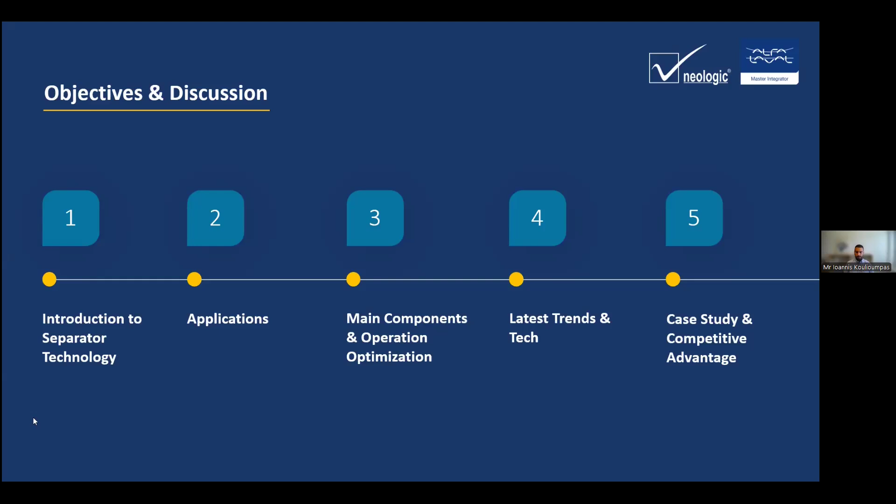And then we will finalize our presentation, before the questions, with a case study about how the advancement of separator technology helps not only on separation itself, but also on energy saving solutions. So let's start with a very small introduction to what separator technology is.

Before we go to that, just to say that we at Alfa Laval are of course proud to be the company that founded and has been innovating, because the company itself has grown on the design of the separator itself from 1883. So this is a product which has been the core of Alfa Laval for more than 130 years now. And our aim is to continue to innovate even more with that product and go forward in order to take separation technology to the very last extent.

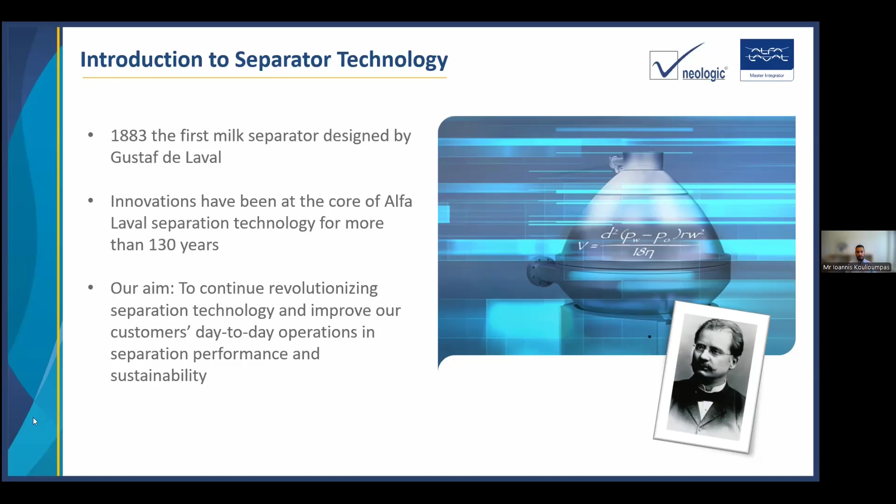And how does the separator work? Basically, it's a technology where you have, in practice, mechanical separation by density difference due to using a centrifugal force. You're separating by density two liquids, or liquids with solids. So it's not a very exotic physics behind it.

However, the design, how we select to create the separator and how we generate its design, gives different perspectives and different technology advancements on the separation performance itself. So there are technologies that are bottom-fed and hermetic, and other top-fed technologies, that create a performance difference in the end on the customer side.

Of course, the performance itself is affected by different parameters, because separators are not only used for dairy but also for other applications. But on the dairy side, the type of product we're using, milk or whey, the flow, the particle size, the temperature, and the density differences affect how separators work and are critical parameters for us to consider when sizing a separator for a different application.

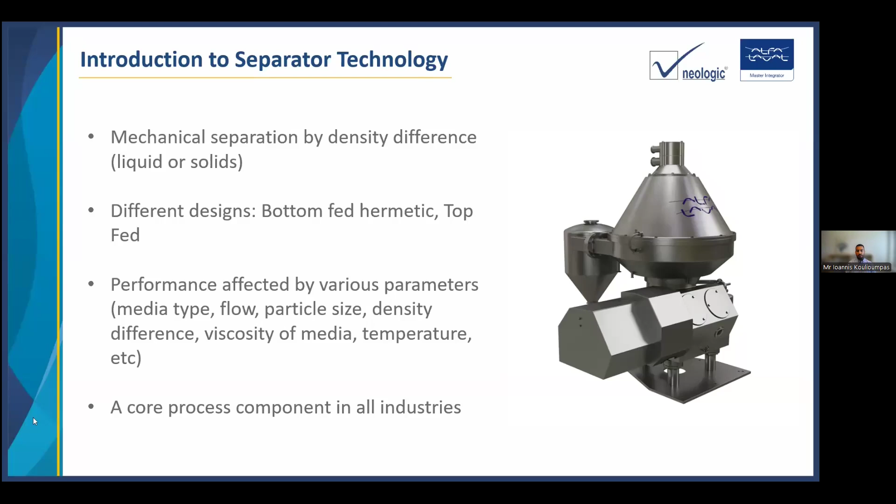However, I also have to say that the separator is a core technology for all food industries. No matter the food industry you are in, you will definitely see a separator on the processing side. And with that being said, I will ask Mr. Mahajan to discuss a bit more about the applications.

As you know, Alfa Laval is a well-known name, and Alfa Laval is the inventor of separation technology. Alfa Laval has been present in India for almost 90 years now, and more than 2,500 separators are working across various parts of India in many dairies. These separators range from 1,000 liters to 50,000 liters. So let us see how separation technology can be used in milk.

First is clarification. When we receive raw milk in the dairy, we have to remove solids like dust particles, somatic cells, and everything, so that raw milk quality is improved. If these impurities are removed, they do not go into further processing like pasteurization, homogenization, and other things. It is important to remove the somatic cells, hair, and many things in the clarification process.

Cream separation. Separation of cream is essential, as you know the fat content of cow milk ranges widely, from 3.5% to 5.2%, depending on the breed and the lactation period. Similarly, for buffalo milk, the fat percentage is always higher than 6%. In market milk, standardized milk is around 4.5% fat, toned milk 3%, and double toned 1.5%. To adjust this fat percent, we have to remove the cream from the milk. That is basic cream separation.

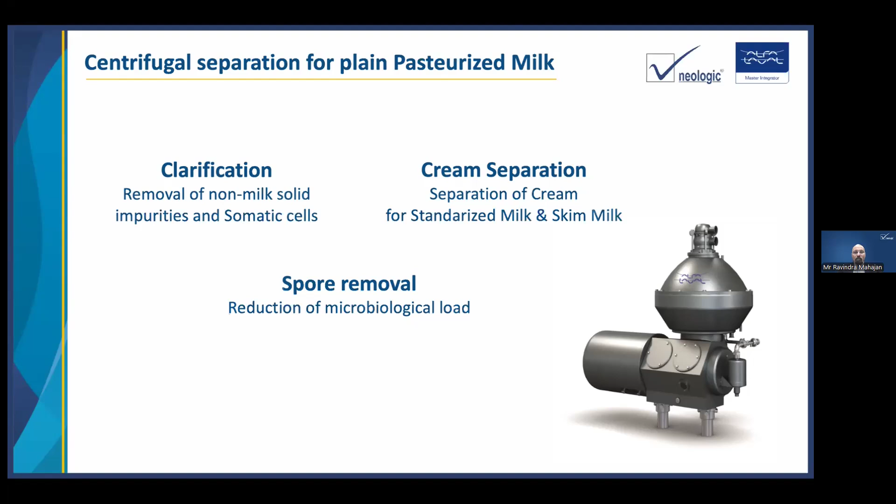And spores removal, reduction of bacterial load. If we are successful in reducing the bacterial load of the milk before thermal treatment, we can reduce the thermal treatment load on the milk and preserve the basic nutritive value. As well, we have fewer microorganisms to kill, so we can maintain lower temperatures in the pasteurization, thermization, and sterilization process. So these are the main three applications.

Now let me take you through clarification. It improves raw milk quality by removing non-milk solids like dirt, straw, sand, animal hair, etc., and also removes somatic cells. In the process, at raw milk reception, we do a cold clarification. It is also possible to use warm milk and do the clarification so that the viscosity is less.

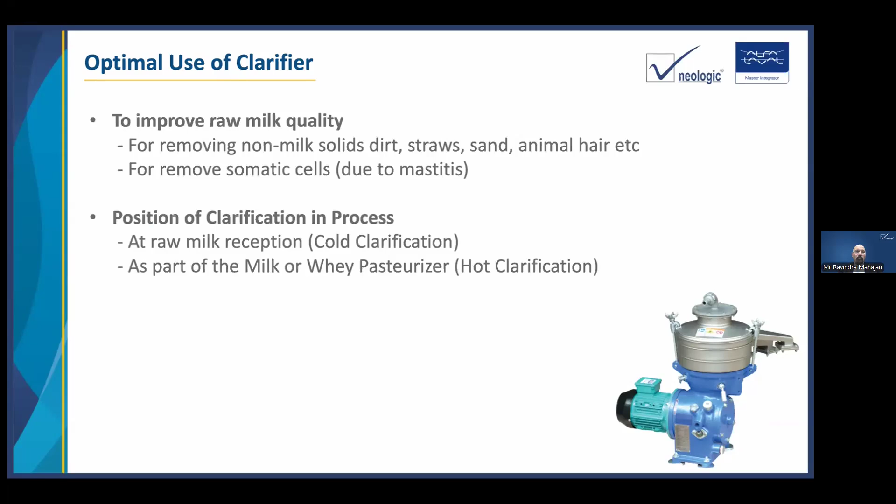And before whey pasteurization, we can do whey clarification. In the cheese and paneer making process, a lot of fat goes into the whey, and we need to remove the fat from the whey. So that is whey clarification. It is necessarily hot clarification.

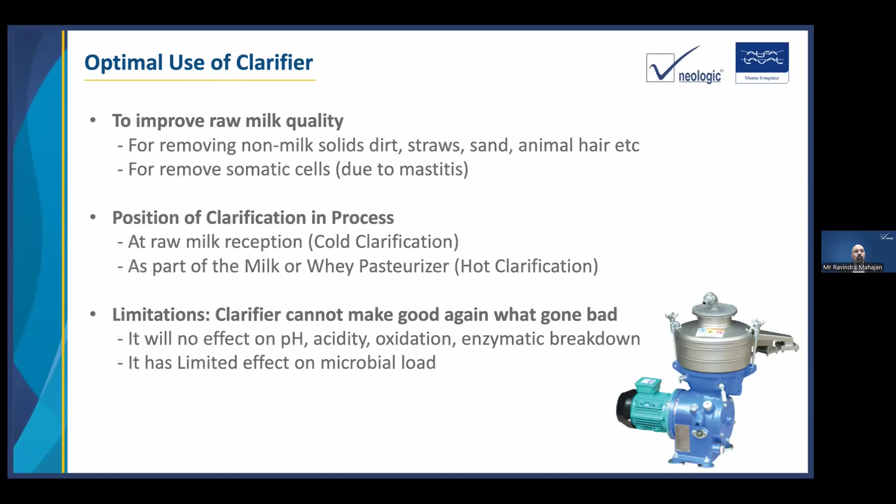Limitations. Let's understand the limitations. A clarifier cannot make good again what has gone bad. If the milk quality is bad, if the milk temperature has increased and the microbial count has increased, pH, acidity, oxidation, enzymatic breakdown, all these are quality problems associated with milk that cannot be handled by a clarifier. It basically reduces the solids and the somatic cell count.

So let's now talk about cream separation. First is full fat skimming.

So we have to dimension the separator or select the separator model in such a way that the milk is 100% skimmed. The allowed fat percentage in the skim milk is 0.05 to 0.06%, so maximum milk fat in the form of cream is removed in full fat skimming.

Then fat standardization. For the market milk or for milk going into the UHT pack, we have to adjust the fat percentage based on the milk quality declared on the package, like toned milk or double toned milk, 3% or 1.5%. We dimension the separator to give a 40% cream outlet continuously and adjust the fat percentage to our desired level.

There are different ways of standardizing it. You can either decide batch standardization by determining the amount of cream to be separated from the batch, or you can do online standardization. Online standardization is quite sophisticated technology, successfully implemented by reputed brands in India. Standardization capacity determines the capacity to reach a low enough fat content in the milk.

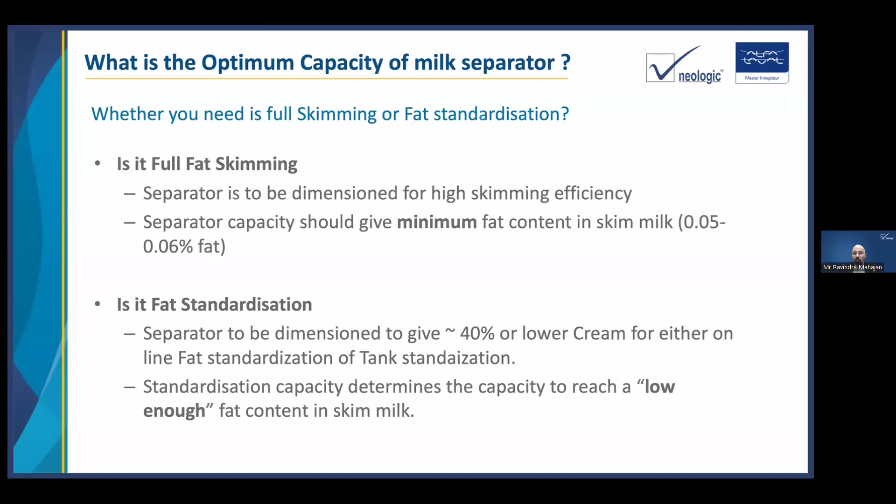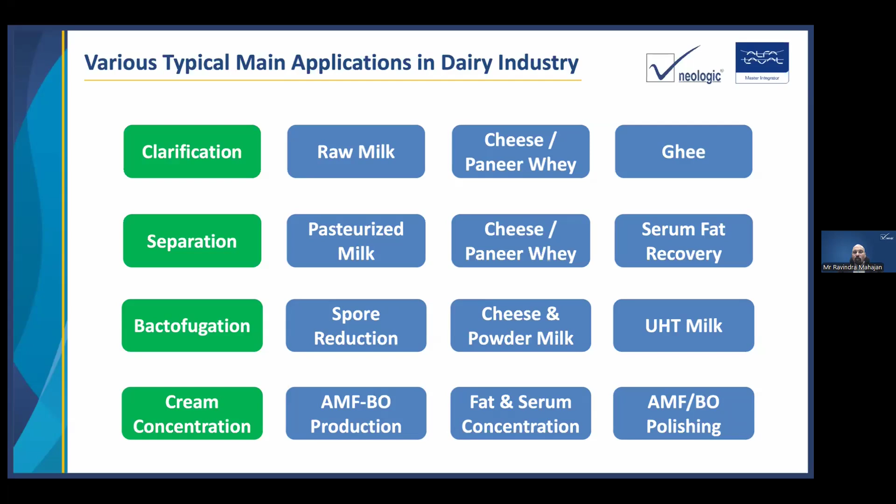So for cream concentration, again it's fat separation using serum separators, and after removing the fat and after production, if we want to remove further solids and liquid parts, then we have to do polishing. So these are some of the applications of a separator.

As you can see in the picture, a high-speed separator system includes, of course, as the heart of the system, the separator itself. This is the core component of the complete system, but in order for it to function, we need different components around it.

For that, we normally have a starter and control panel where you can control the way the separator behaves, and these also connect to other parts of the plant, for example a central SCADA system. We need a service liquid unit on site, which covers the different utilities used, like water and compressed air, to support the separator during operation, for example for discharge functions or flushing or other functions.

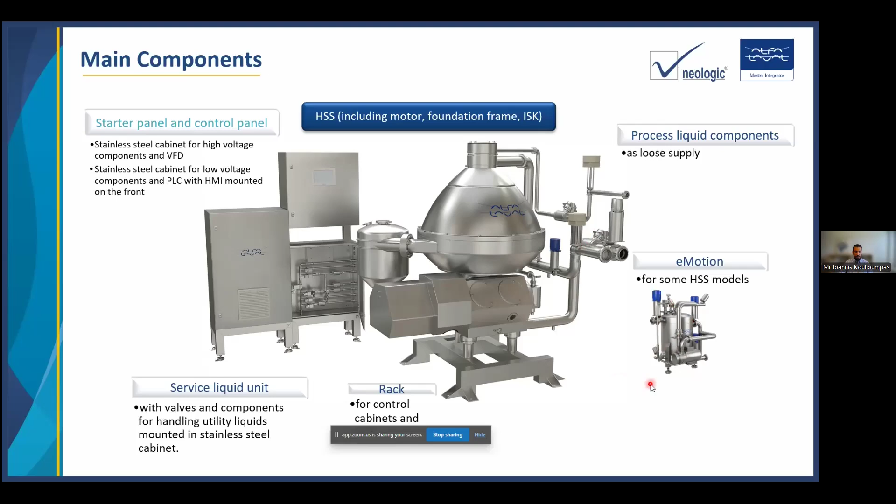Then we have different valves and instrumentation at the back end or outlet of the separator to control the process itself, and other skid modules around the separator that support different features, such as the e-motion unit shown here, which I will explain to you later.

How do we control the process? Of course, there are different ways to control it. Three main ways are by adjusting the back pressure control through the valves in the outlet, so it's possible to set different types of pressures.

That type of control is done through the HMI of the unit, basically where we are setting up the fat content of the cream.

The same can happen also through flow control. Normally the skimmed milk will be set in terms of a value of the inlet flow, and then the back pressure will automatically adjust to use the set point we have already indicated on the HMI. Therefore, the fat content will be determined by the light phase back pressure.

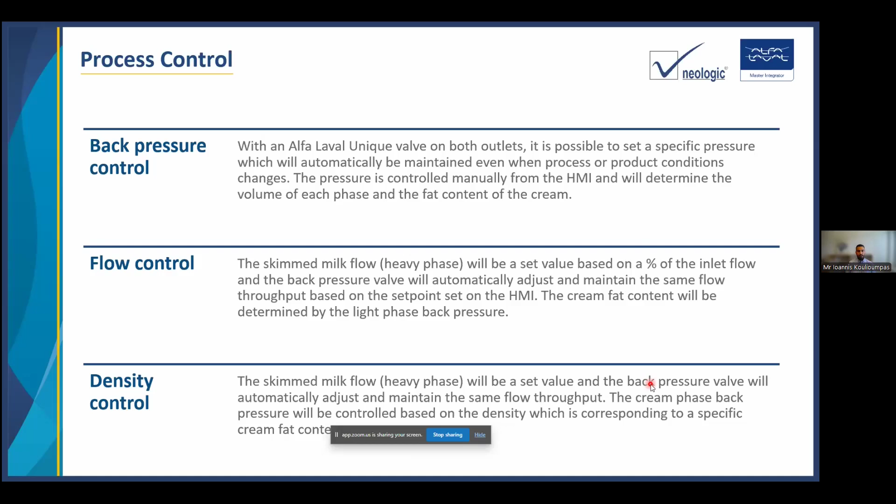Finally, in different applications, we also have the possibility to control how the cream concentration or skimming efficiency of the machine will go by a set point in density on the milk on the cream outlet. So the cream phase back pressure will be controlled by a density set point that we are creating. So there are different ways of processing and controlling the behavior of the high-speed separator.

So let's talk, now that we have learned more about the application, a bit more about the separator, how it works and how we control it.

Let's take a deep dive now into the different types of design trends and innovations that are supporting a more sustainable production of dairy products. As we said before, the focus that comes together with Alfa Laval is that we want to optimize even more the separation performance we are having today on our existing models.

Given the fact that Alfa Laval has set very aggressive targets to become carbon zero, but also to support our customers in their struggle to minimize their environmental footprint, there is a strong focus on making our separators even more energy effective than they are today.

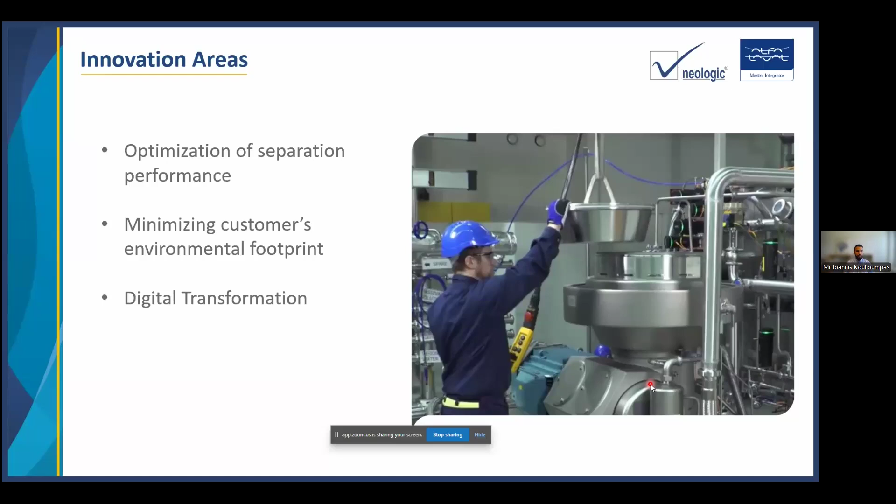And in order to do so, we are trying to connect, to the best possible extent, the separators with different sensoring technology, exploring more on the digital side how we can make those units even more intelligent.

So the first and most important parameter is that our separators and the separator technology tend to create a bigger and better efficiency when it comes to separation efficiency. And there are different designs out there, as we said before. The Hermetic design is the focus of our separation technology. It is a unique bottom-fed design that creates a bowl free from air, or airtight, and it enables improved product quality and reduces power consumption significantly. I will explain how that works.

The second part, related to the performance of the units, is a new design of discs that we have introduced in the market. Not only do they increase the capacity, but they also improve the hygiene. How do we do that? It's because that type of technology is based on non-welded discs, so on those discs we have actually zero welds. They are pressed discs. I will come to that a bit later.

As I mentioned before, one of the innovation areas we're focusing on is having the best energy efficient separator in the market. eMotion is an innovation technology we have developed here in Alfa Laval that helps significantly in that direction, and it reduces even more the power consumption of our separators to an even lower extent, thus reducing significantly the carbon dioxide footprint of all dairies. I will explain a bit about that as well.

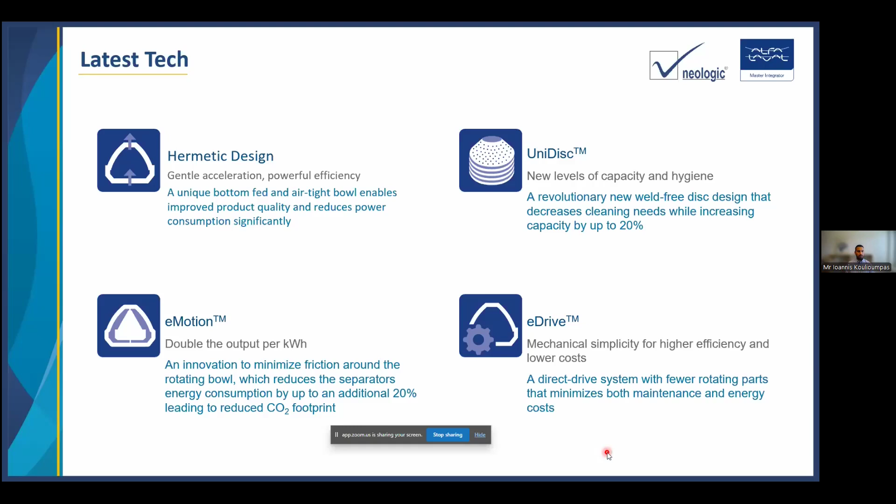So how does a hermetic design work, and why does that give a better separation performance compared to the traditional top-fed design? Basically, what we are doing is having a separator that is fully free of air. The inlet comes from the bottom, and we are using two rotating pump wheels on the outlet in order to push out the liquid, milk or whey, towards downstream on the process.

The key element that makes the separation performance stick out, especially when it comes to skimming efficiency, is the fact that the product is accelerated smoothly through the hollow spindle before entering the bowl. We all know that fat globules are very sensitive to shear forces and break down, so with that type of design we are allowing those fat globules to stay intact as much as possible while entering the separator. Therefore, if you don't have that fat globule splitting, you're having a better and bigger size of

molecules inside the milk, and that enables a higher skimming efficiency. Therefore, we can ensure the lowest possible skimming loss in the market, and at the same time, due to the flexibility of the unit, because you are controlling how the separator behaves through the back pressures we mentioned before, we have the possibility to concentrate the cream up to 60% fat while maintaining a very good skimming efficiency.

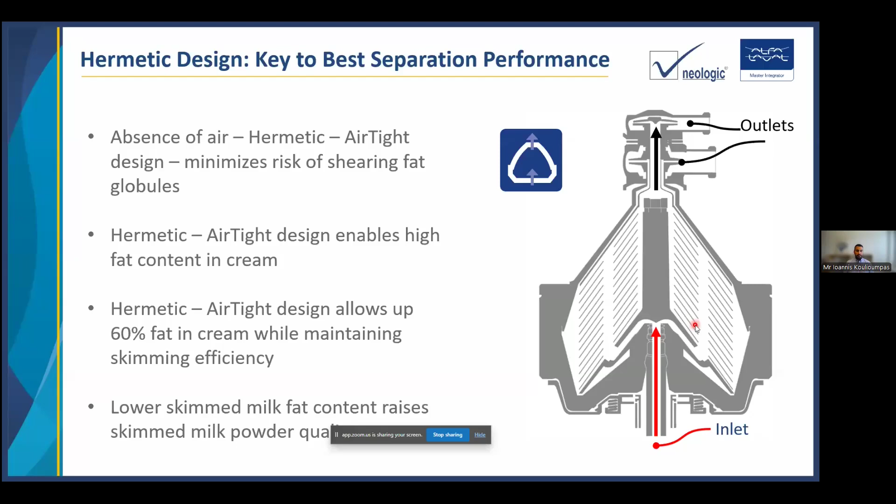For powder plants, skimming efficiency is a vital thing. So even improving by 0.01% in terms of skimming efficiency, the financial benefit in the end is far bigger.

What we are actually saying here is that the bowl is completely filled with liquid, which supports particles not splitting, and that increases the skimming efficiency, which can go even below 0.05% thanks to the gentle inlet. At the same time, since the bowl is always full with no air pockets, there is no air mixing with the product, which significantly maintains the quality and, to a further extent, the shelf life of the product.

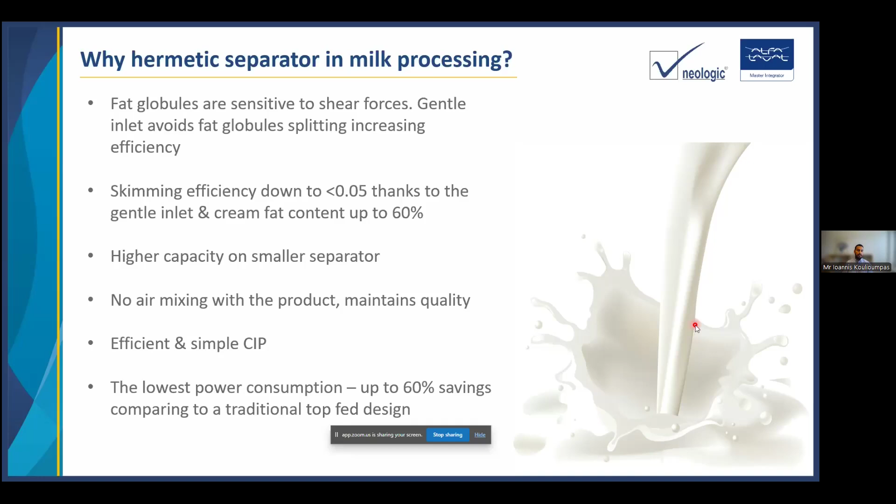But at the same time, it gives a better, more simple and efficient CIP, because there are no hidden air pockets inside the bowl, which is traditionally the case for top-fed traditional separators. Not only that, but due to the fact that the hermetic design makes this process even smoother, we are saving up to 60% power consumption compared to other designs.

So what we can think here is that with a hermetic separator, you have flexible production that lets you get even more value from your milk, either by improving the skimming efficiency by even the slightest 0.01% and generating increased revenue due to higher cream sales volume, or by concentrating the cream further in order to get much more skimmed milk in terms of volume.

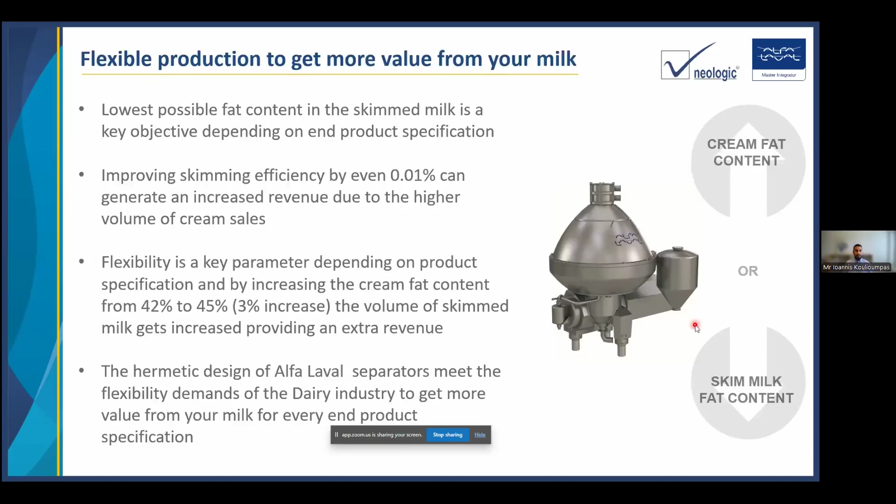So the hermetic design of dairy separators meets the flexibility demands of the dairy industry, and of course gives you the possibility to have much more value from the milk in any of the final products you are making. So, eMotion technology.

How does it look if we take the most energy effective separator and make it even more energy effective? I think that would be the title of this type of technology. eMotion technology creates all the necessary conditions for the separator to work in the best possible power consumption conditions. On top of the hermetic design benefits, what we are doing with this type of

technology is that we are creating low pressure conditions inside the separator. The air friction between the rotating bowl, which rotates at high speed, and the air inside the casing is the main contributor to the power consumption of the bowl. Therefore, if we reduce this air, because we cannot totally take it out, and create these low pressure conditions, we are reducing significantly the power consumption, by even 70%

compared to traditional top-fed separators. Not only that, but we also have the benefit of reducing the temperature pickup, which is very beneficial, especially when processing milk in cold conditions. But of course, it's also very valid for maintaining the quality of the milk throughout the process, even in hot milk skimming, whey skimming, or clarification as well.

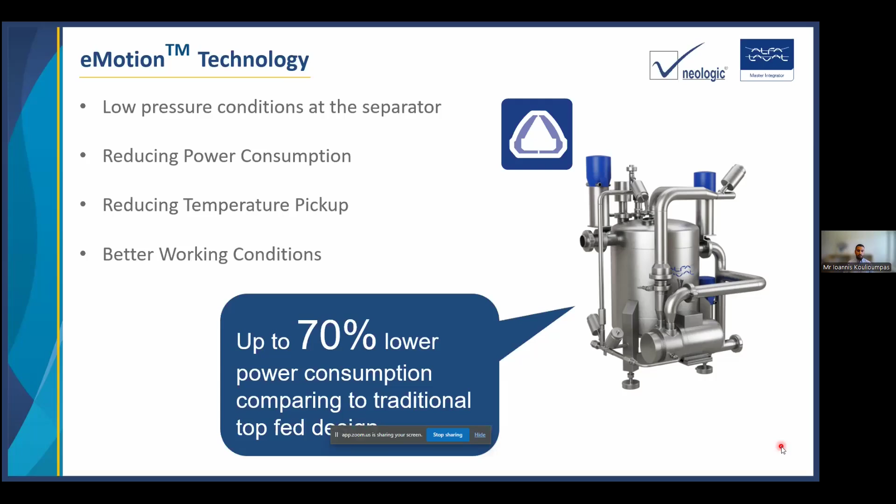Another side benefit of installing and using an eMotion technology is the fact that we have lower sound levels. And that is, of course, also important for the people that are working on the operational floor, because we are contributing to better working conditions in the factory, which is also a very important parameter as well.

The next type of innovation, which is related, as I said before, to the performance of the separators, is the UniDiscs. So the UniDiscs, together with the hermetic design, are a new type of disc that you can see here on the slide. We have no welded caulks, as you can see between those two pictures. Weldings are the traditional way of making discs, but what this innovation has brought into the market is that we have pressed the discs through forming.

This design, first and foremost, makes a difference because we have the possibility to add much more discs inside the same separator. The reason is this type of micro-caulks that are made from this shear forming process. And they are also much more hygienic because of the absence of welding. So even CIP time is actually reduced. It's easier to CIP. And as an example, even in the US, the USDA has really loved this type of innovation because it supports their 3A demands for the dairy industry.

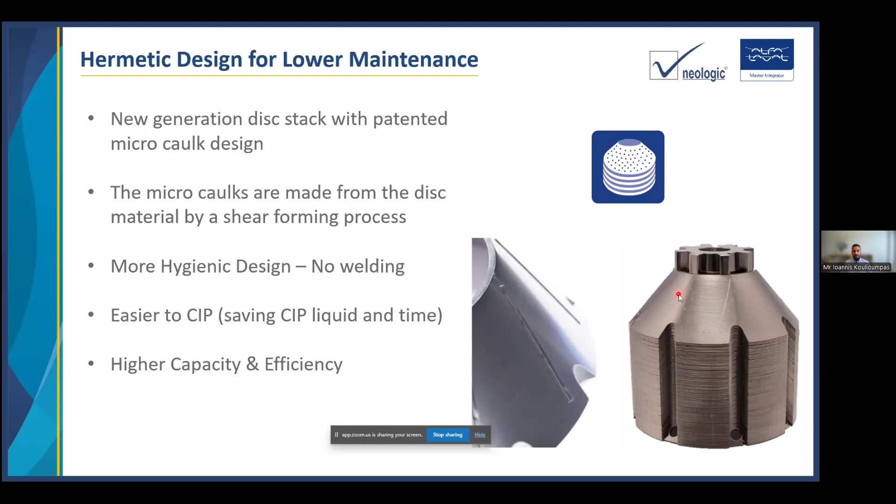So the benefit is that we could, of course, increase the performance of the unit because we are adding more discs. But at the same time, we have the possibility to have a better hygienic design, easier CIP conditions, and also maintain the same separation efficiency that we have named before.

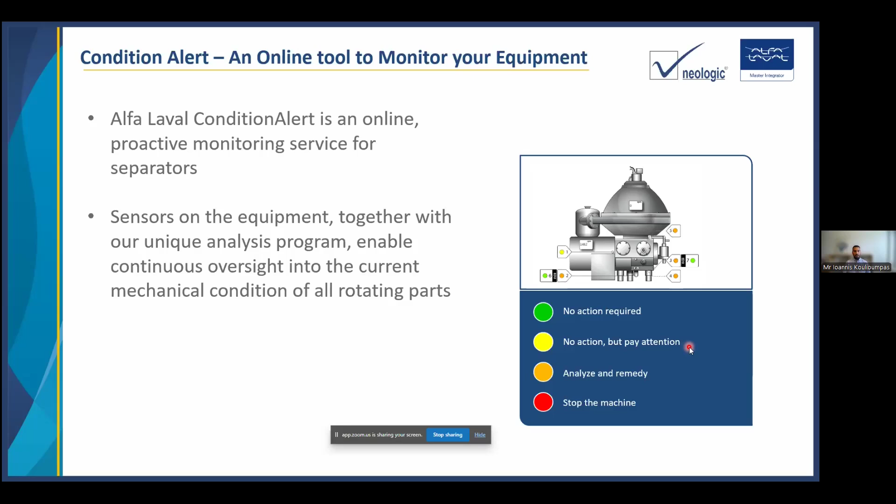Going on to the digital aspect of the separator, what we're trying to do is monitor our equipment continuously, and for that Alfa Laval is supporting today's technology with what we call Condition Alert. Condition Alert is an online and proactive monitoring service developed by Alfa Laval with different types of sensors that proactively monitor this type of equipment in order to provide feedback not only to the customers but also to us on how the units are operated. So we can support with information about the mechanical condition of all rotating parts, so that we can inform all customers beforehand about the health of their equipment.

So Condition Alert is a monitoring tool based on Alfa Laval's 30 years of experience in the field. And we're using it for equipment worldwide in different applications. We have the possibility to provide immediate warnings or emails if we see some kind of abnormal behavior. You have access to our IoT portal, so there is a possibility to check the status of the equipment in the long term. And working with this tool, you have the possibility to gain support from Alfa Laval experts, who give feedback on how the separator works, what type of improvements can be done, or analysis for preventive maintenance in the future.

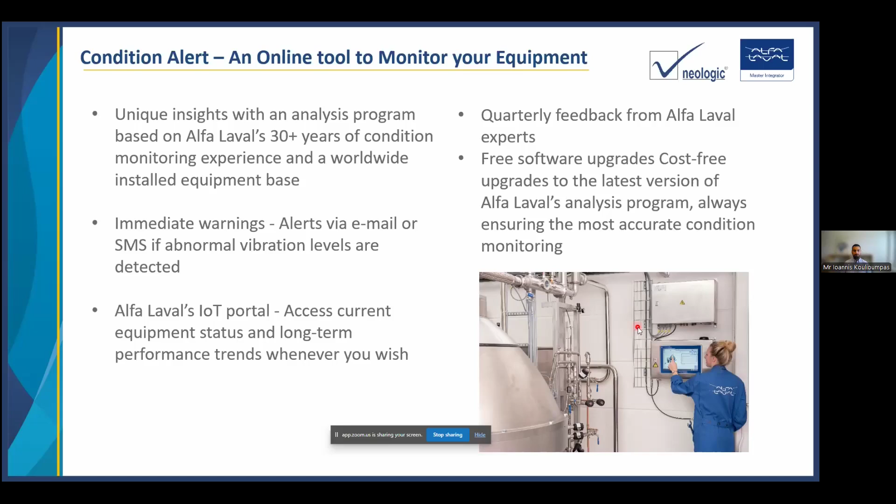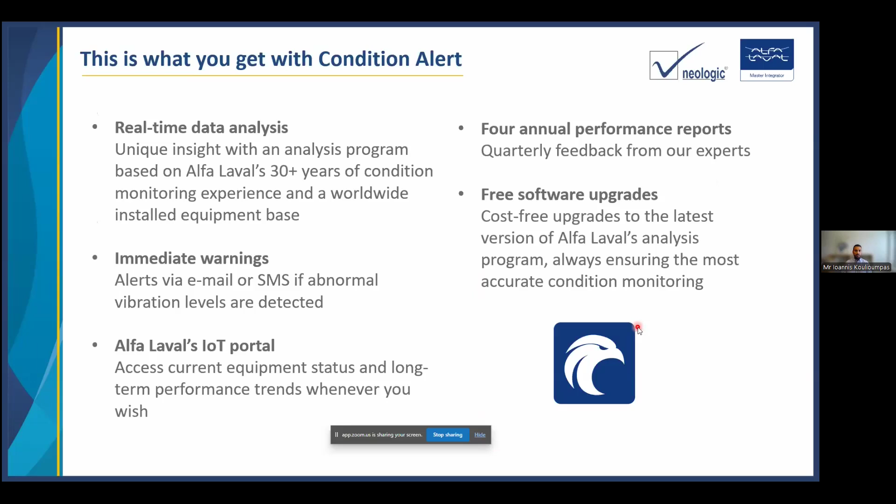It is an easy installation with two different types of units and small panels, which are connected to our IoT portal. So overall, the idea is that we are using this type of portal in order to get cost-free upgrades to the latest version of the Alfa Laval analysis program, but also to ensure the most accurate condition monitoring of your equipment.

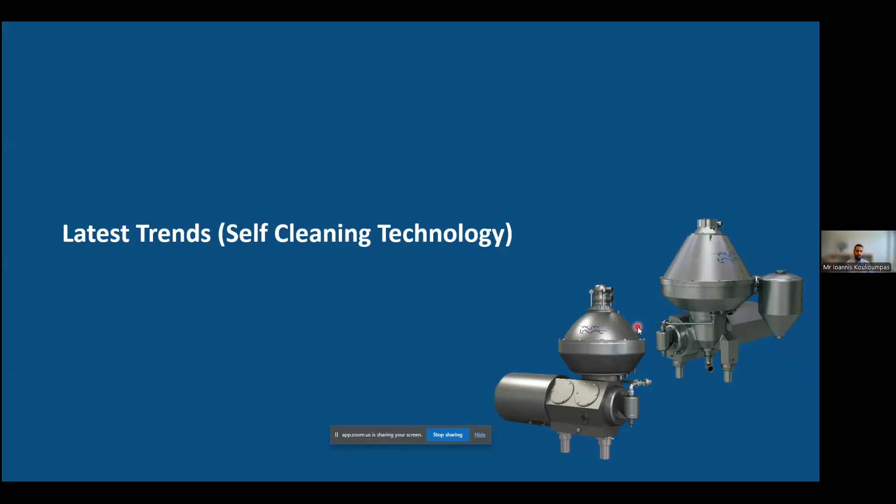And then finally, we come to the topic of the latest trends in self-cleaning technology. Alfa Laval has been present for many years by delivering large separator units to the market. We are, of course, aware that the smaller range and smaller dairies has been one of the points we would like to understand and work on as well.

We know that solid bowl machines are, of course, there in the market, and they will continue being there as well. But at the same time, there is time for more industrial and more self-cleaning separators in the market. Therefore, there are new separators developed, the Compacta separator series, that have the possibility to be fully discharging, self-discharging, and fully CIP-able. Those are skid-mounted, as you can see here on the right side, with all the valves and instrumentation in order to be able to process the milk directly.

So basically, we're talking about plug-and-play units with a very easy to use control cabinet with a PLC. Together with that, we have, of course, commissioning spares, documentation and a set of tools. And it's a ready-to-use package for any small dairy that is looking in the future to convert from manual operations and cleaning the discs to a more automated platform, which has the possibility also to scale up, with the condition that the dairy will scale up as well in the future. So it is a sustainable investment for different cooperatives and different small dairies.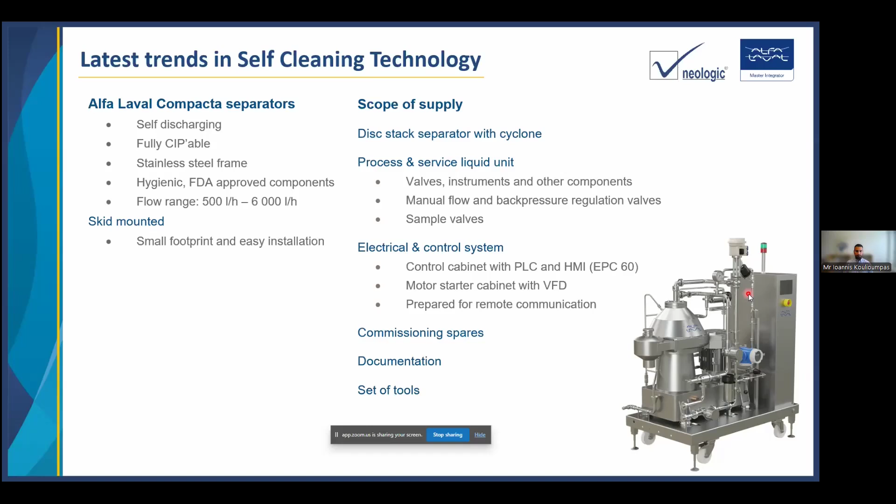And finally, we would like to shed light on a case study, not on performance, but to explain why different technologies and innovations related to power consumption are making a very big difference and huge impact on the dairy industry, but also on other industries as well. So today we are focusing not on the skimming efficiency, but how much savings a dairy or any other industry can have by using the advancement of the hermetic design together with the eMotion technology.

So we have benchmarked these installations that we have in the field in the same operating flow rates with an existing top-fed, belt-driven separator, just to compare the technologies. And we came to the obvious conclusion that the power consumption after measuring has been more than 63% less when it comes to the hermetic technology itself and the eMotion addition.

So the specific customer has indicated that they are now saving 244,000 kilowatt hours per year in a 21-hour shift per day, which is a significant improvement when it comes to power consumption and their carbon dioxide footprint. And of course, that money they can reinvest in other parts of the process. So it's fair to say that the hermetic design together with eMotion is the best-in-class technology available today in the market to support all industries in their struggle with the carbon dioxide footprint.

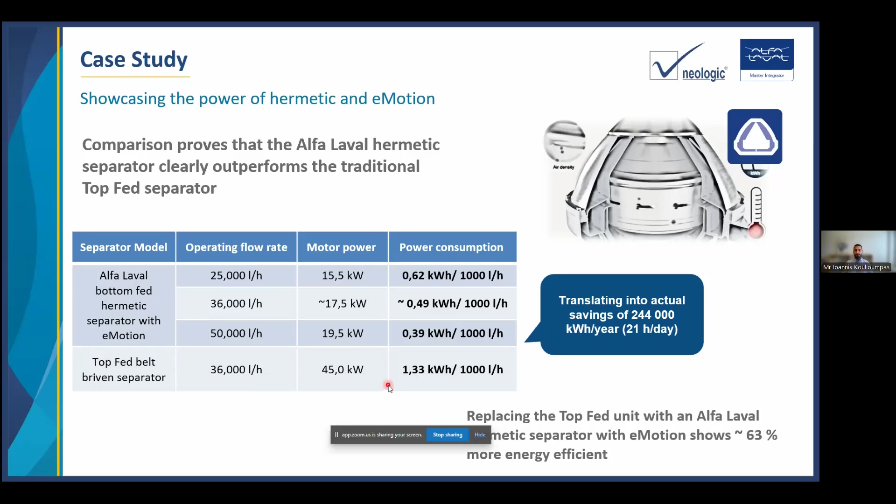So overall, hermetic separators provide the best skimming efficiency in the field. They have the necessary production flexibility to get either the best skimming efficiency or concentrated fat content in the cream. The fact that we have no air inside the product maintains product quality, but at the same time gives the lowest power consumption in the market. And innovations such as UniDisc or eMotion enhance performance and provide the best-in-class power consumption technology in the market when it comes to separator technology today.

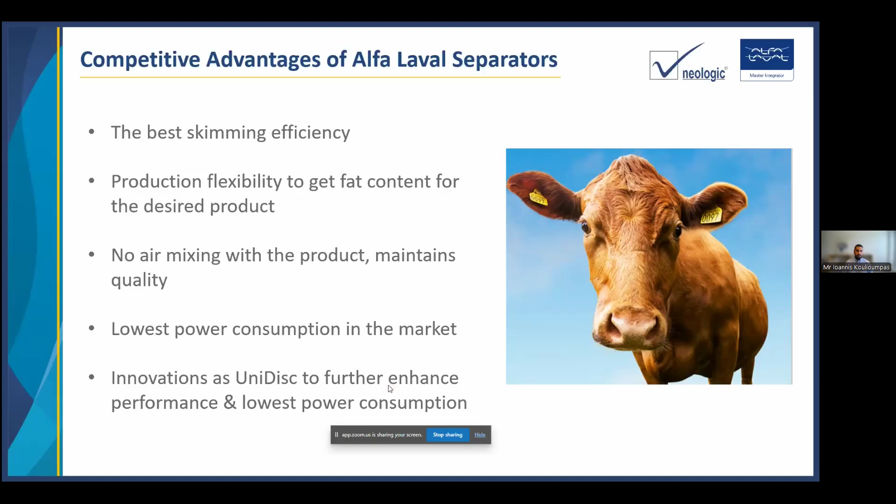So, to recap, we discussed how the separator works today and the basic principles. We presented all the different applications within the dairy, how a general separator system looks, and how we can optimize the performance. We focused quite heavily on the different innovation trends, but also the financial benefits that someone can get with different types of technologies. And we shed more light on the selected case study to see the financial benefits of using the eMotion technology together with a bottom-fed hermetic design, and of course the competitive advantages of it.

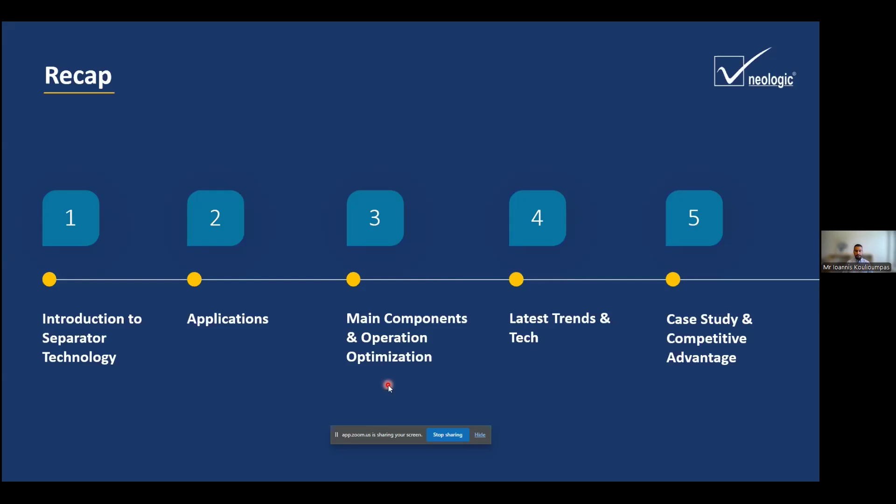So we have received a few questions. The first question is from Mr. Aditya: can the latest high-speed dairy separators handle variable input flow rates, and if so, how do they adjust to these variations? Yes, of course they can, and especially hermetic units can be adjusted to various flow rates. In principle, we adjust the processing conditions inside the separator to match the flow rate of different lines. So yes, it is possible.

And to add, the separator is always filled under pressure with a back pressure. The separator is always filled, and there is no cavitation happening inside the separator bowl. So even if it is a low flow, you are actually allowing more residence time for separation. So there is no problem.

Yeah, there is a question from Mr. Suryakant Reddy. We talked about eMotion separators, but his question is: how are these separators different from the existing hermetic separators? Possibly Ioannis can take that question.

Yeah. So the existing hermetic design of course is the one that we have had traditionally over the last, I would say, many years. The hermetic design was based on biotech separators in the past, and those separators have been on the forefront of technology development up to now.